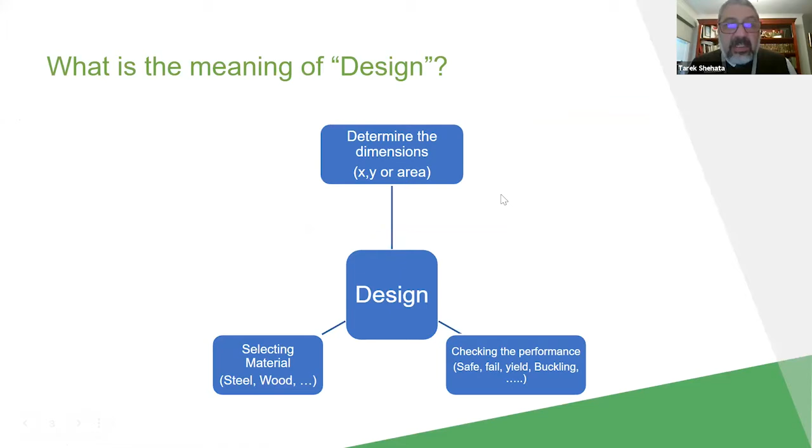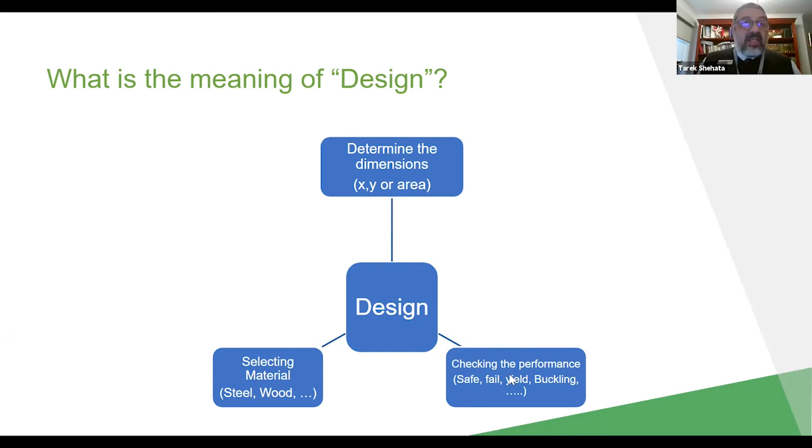When we talk about design, mainly we talk about three issues. Either as a designer to determine the size, so to talk about area or dimensions, to say this part should be in this size; or to select the material, to say based on the required sizes and the loads, we are going to have this material, so you can say steel, wood, aluminum, and so on; or as a designer to check the performance of the member.

Last week, we were talking about the member under tension. We said the load, when we describe it as an axial load, we talk about the load being through the axis of the member. This is why we call it an axial loaded member. Last week we finished tension, so today we are going to talk about compression.

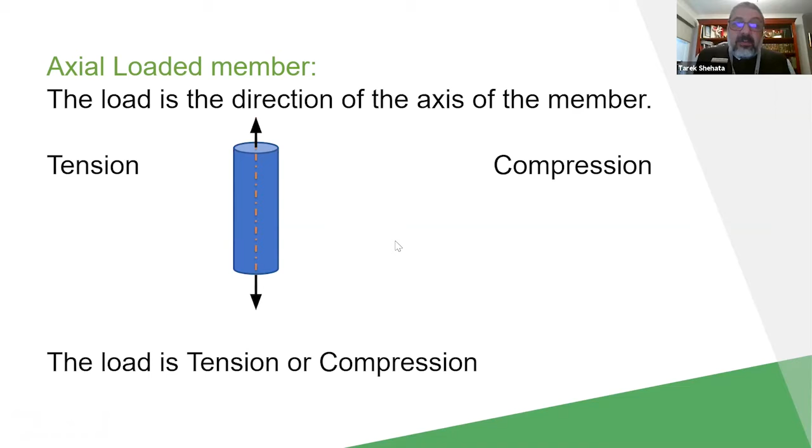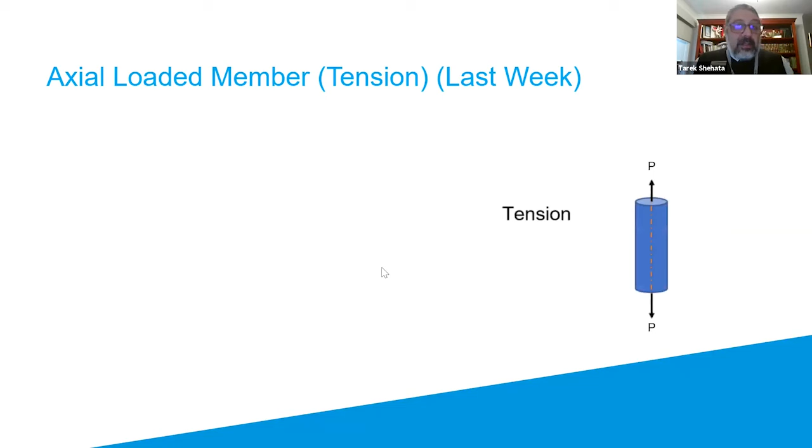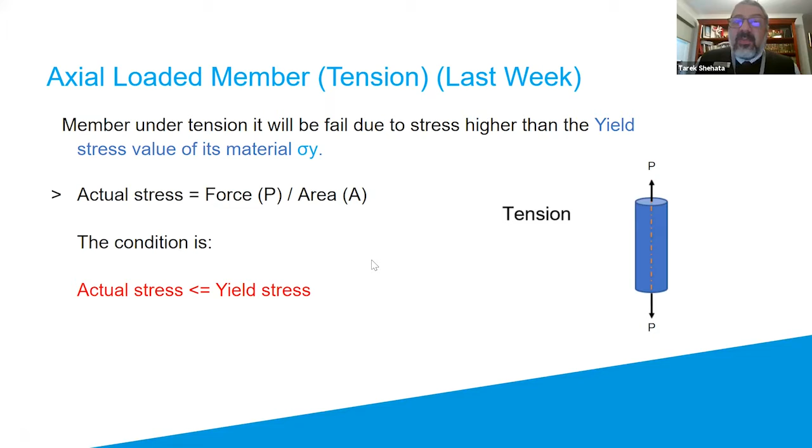So in the case of compression, let's review what we did in tension last week. We said the main condition for tension is that based on how much load I have and what is the actual area, I can calculate my actual stress. To be safe in tension, you need the actual stress to be less than or equal to the yield stress. Yield stress is one of the material properties.

Today, we are going to talk about the axial load, so in this case we'll talk about compression, and mainly today we are going to concentrate on how to use the Euler equation. So, member under compression, axial load: as you can see in the figure here, I have the member in a shape - doesn't matter what is the shape, I selected a cylindrical shape. So the load itself, P, compresses the member in the direction of the X axis of this member.

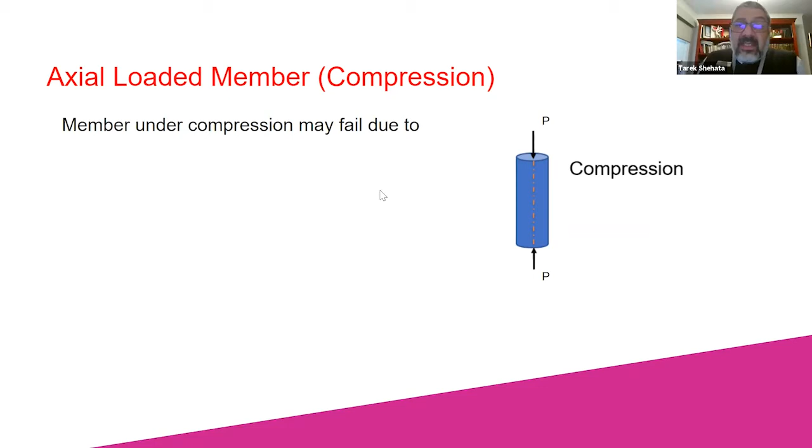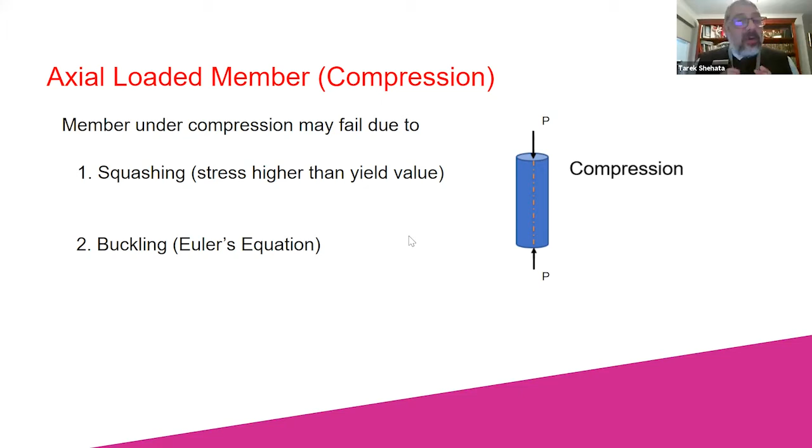In this case, we worry in our design this member will fail. The member will fail due to compression because of two things: either squashing, where the load will squash the member, or the member will be buckled. Buckling means the member is not broken, but it could be bent, something like that. So buckling is when the member will be bent. I have another picture to help us show it's not broken, but it will be bent.

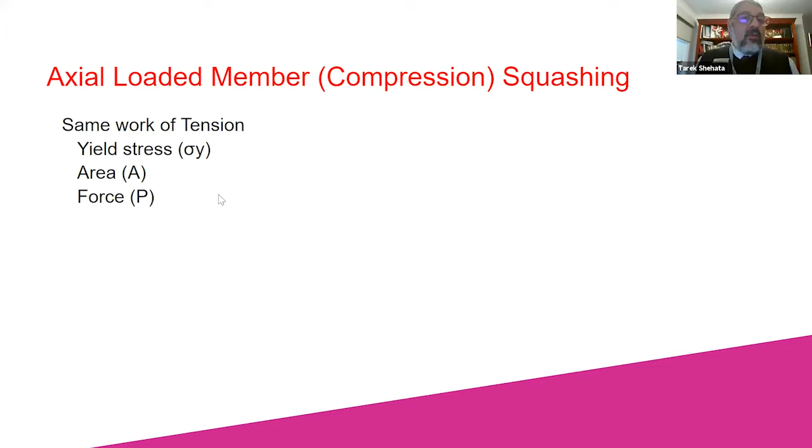Last week, when we discussed tension, the case of squashing is similar, so what we did for tension will be the same for squashing. You check how much actual stress you have and compare it with the yield stress. If your actual stress is smaller than or equal to the yield stress, the member is safe. If not, the member will fail.

But today we wanted to discuss the case of buckling. Buckling is controlled by an equation called the Euler buckling load. This equation can tell us what is the maximum load based on the properties of my member.

This term may be new to us. We have, soon we will talk about it, the length, and this is again part of the dimension of the member. So in this case, you will find Euler linked some elements related to material properties, like Young's modulus, and some elements related to the dimension of my member, like I and L.

What is the condition? You need to have your load not exceed the load calculated by Euler. What's the meaning of that? Euler load is the maximum load to be carried if you have this member. So this is the condition: if your load exceeds the Euler load, P Euler, in this case, the member will fail.

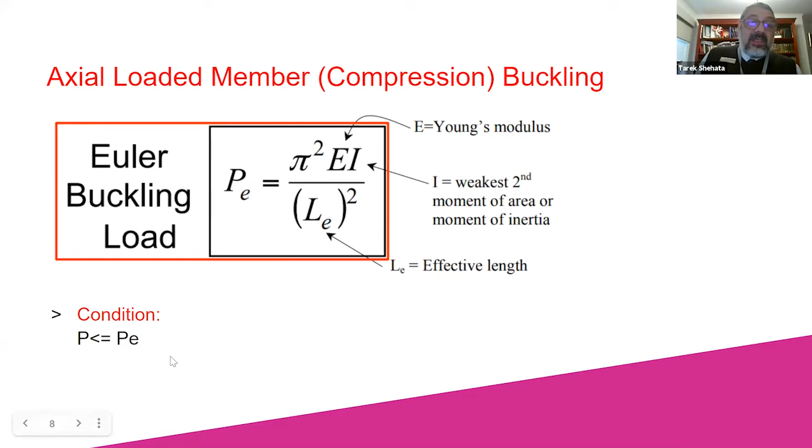Okay, so effective length. Effective length, maybe this is a new term for us. We know the length, so if I have a member between two points here, I can say this is the length of the member. So what is the effective length?

Effective length is, when I have a member under compression, the part of the length of this member that gives me half of the sine curve - half of it - this will be my effective length. Look at this case here, pin to pin: the whole member is curved, so K will be equal to 1. So the effective length for this case will be the whole length.

But if I have the member fixed from the two sides, in this case, you will find at the start the member will not be bent, and at the end it will not be bent, but half of it will be curved. This is why we consider the effective length, and K in this case will be equal to 0.5.

Case of fixed in one point and pinned in another point: you will see that the bending happened not all the way - close to the end it's straight now - but about 70% of the member is curved.

But if I have a member like the last one, fixed to free, if I wanted to get half of a sine wave, I need this curve to be twice as long. This is why K will be equal to 2. It's very important for us to know that the effective length will be based on the way we fix the member, or the way we support the member.

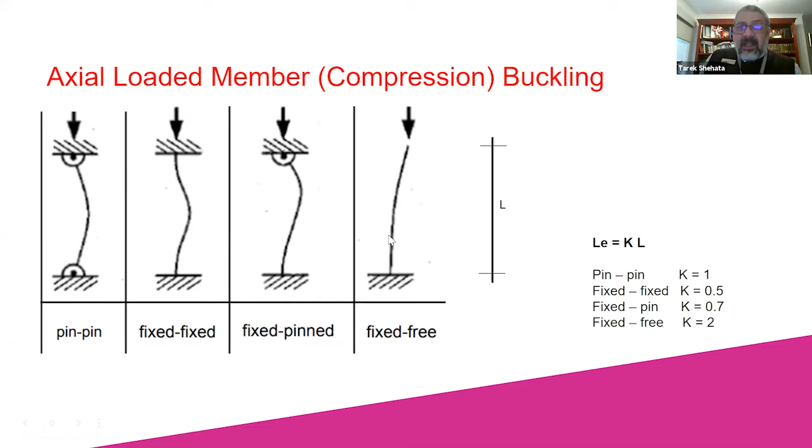Let's see the different cases. As I said, Euler is for today, because, as I said before, we covered tension last week, and we know squashing will be similar to tension, so I'm not going to repeat what we did last week. Today we'll concentrate on how to use Euler to calculate or check your member under a compression axial load. Let's see the first case here.

If I have the material, the effective length, and the cross-section property, which is the moment of inertia, Euler can help me find what is the maximum load. If I know the maximum load, this will tell me later if my member is safe or not. So if I have all these given, I can determine the maximum load I can apply to this member. This is one case. Euler will stay with us for another case.

If I have material properties E, the effective length LE, and the force, Euler can help me determine, if you look at the equation, you have the load, E, and L, so you can calculate the minimum value of I. In the following weeks, we'll give you a special lecture about how to calculate the value of I, so maybe later I'll just give you the value of I directly, but there is a special session to calculate it.

Another case: what if I have the effective length, the cross-section property I, and the load? In this case, I can calculate the minimum value of E. And the minimum value of E will tell me which material I can select.

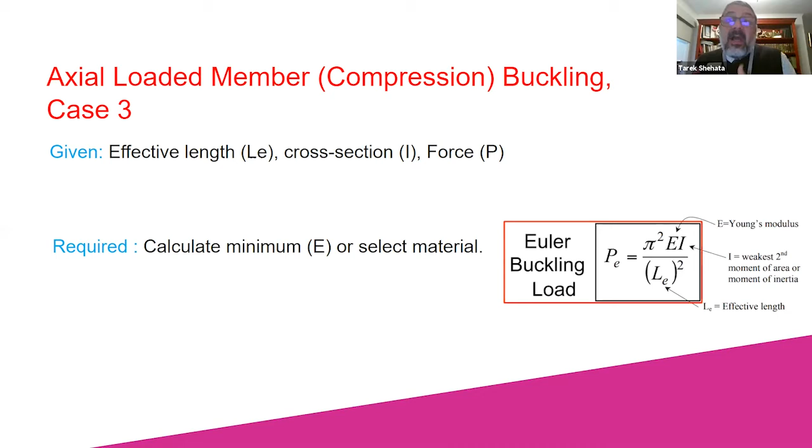For example, if I check the tables now, I need a material with 150 gigapascal. If I check the tables, I will not find any material exactly 150 gigapascal, so I'll try to see a material higher. If I check steel, it will be 200 gigapascal. If I check aluminum, it will be 70 gigapascal. So in this case, I can't take aluminum, it's 70, I need 150, but I'll take steel, because steel is higher than the minimum I need.

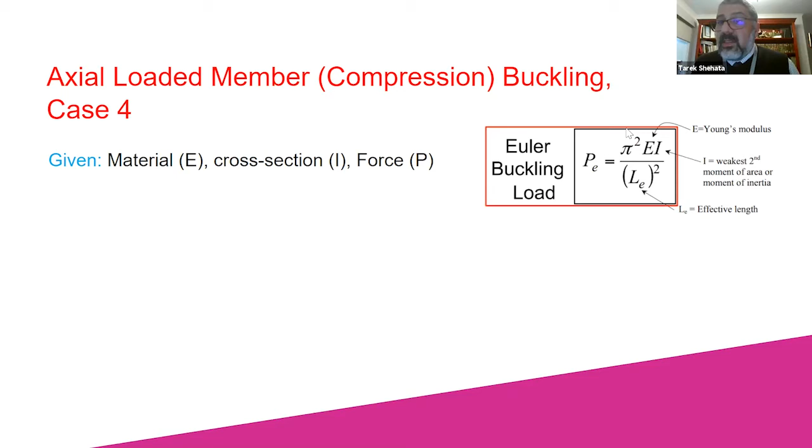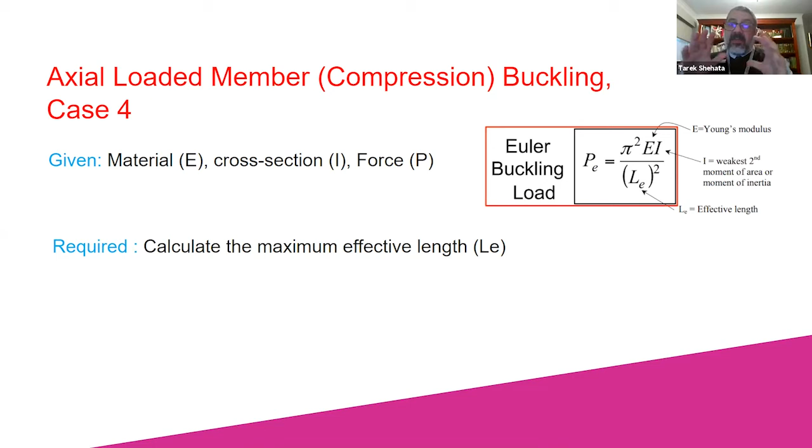Still, we have Euler. What if I have the material property E, the cross-section property I, and the force? This will tell me what is the maximum length I can have for this member. Because if the length increases, the load will be above the limit, and in this case I will not be able to carry the load and the member will start to buckle.

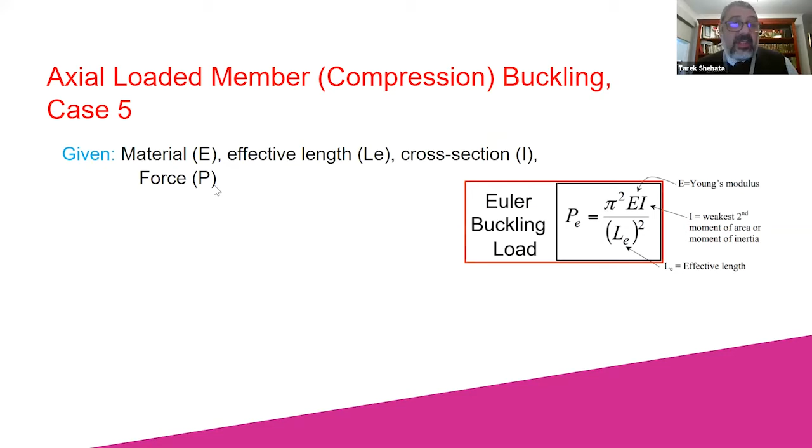Last case here for Euler. If I have the material property E, the effective length, the cross-section property I, and even the load, what I have to do as a designer is check if this load is safe or not. If you have all this information, you can compare your actual load to Euler's calculation. If your actual load is higher than Euler, that means this member is not safe. If your actual load is smaller than Euler, your member is safe.

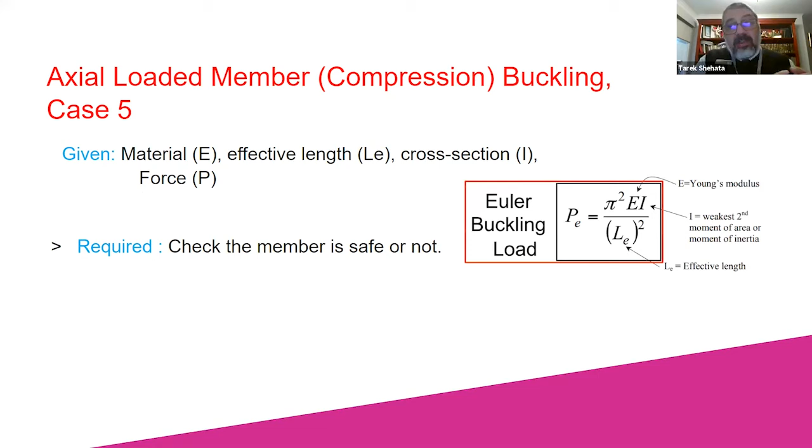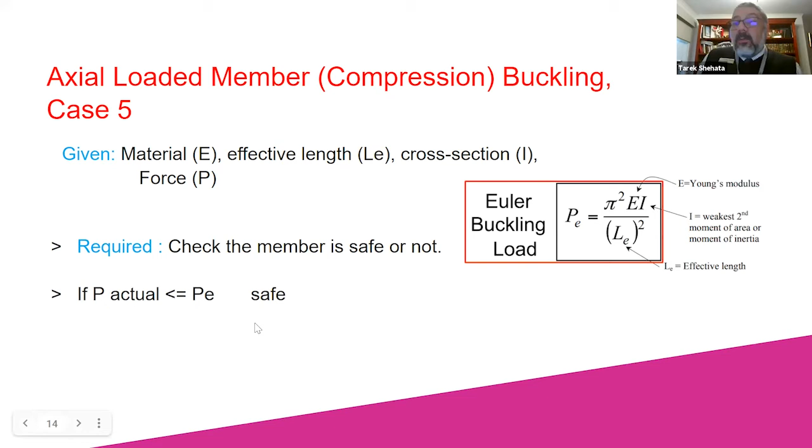If your actual load is exactly equal to the Euler calculation, you are just safe, meaning this is the critical value. The condition all the time is that the actual load needs to be smaller than or equal to the Euler load. I think a numerical example can summarize all this story when we do it together.

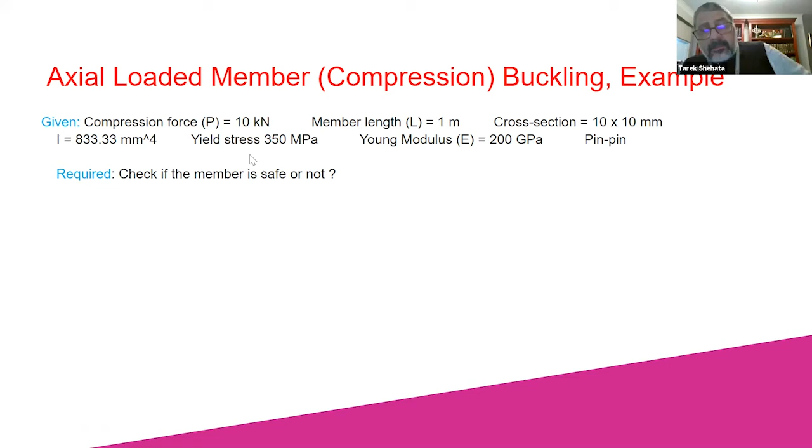So we have material properties given to us, a case with a compression load of 10 kilonewton, member length 1 meter, cross section 10 by 10 millimeter, I of this cross section is 833.33 millimeter to the power 4, yield stress 350 megapascal, Young's modulus E 200 gigapascal, and this member is pin-to-pin in support.

We want to check if this member is safe or not. The load is compression, so I have to check: is this member under tension or compression? The member is under compression, so I have to check two things: first squashing, second buckling. If the member passes both, safe for both, the member will be okay. If the member passes one and fails the other, the member will fail. If the member fails both, it definitely fails.

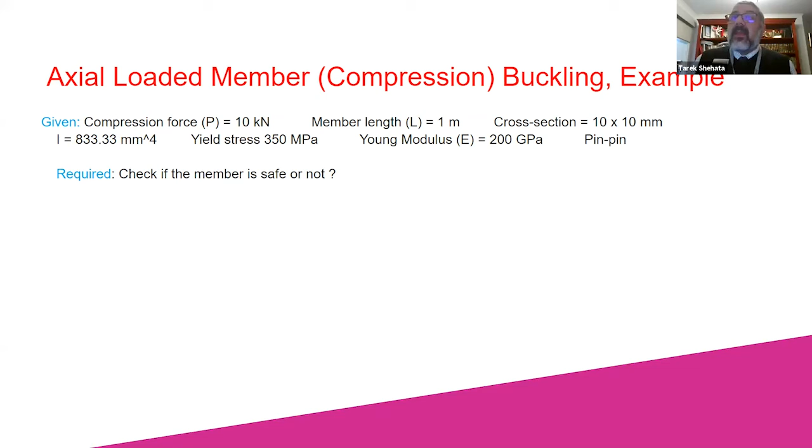So let's see now when I check the squashing. I'm going to calculate the actual stress. I have force, 10 kilonewton. Because our equation uses SI units, you have to put the forces in Newton, so 10,000 Newton, divided by area. Area is 10 by 10 millimeter square. This will give me 100 megapascal.

My actual load or my actual stress now is 100 megapascal. For squashing, I compare based on yield. So if I look at 100 megapascal and the yield stress 350, my stress is less than the yield value. So my actual stress is smaller than yield stress, which is 350. So far, I can say the member is safe, okay for squashing.

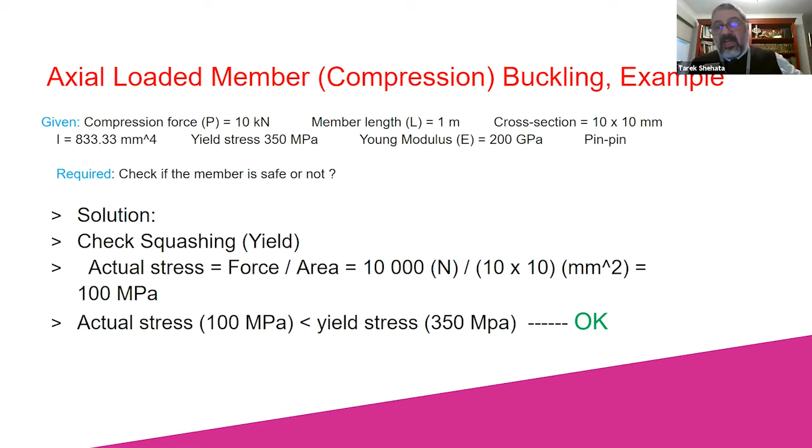I have now to check using Euler the buckling situation. If the member passes buckling, fine, we can say safe. We have to bring Euler with us. Don't forget, we have everything: the load, Young's modulus, I, LE, we have everything. So what I'm going to do is check first for this member. The member has E, I, and L.

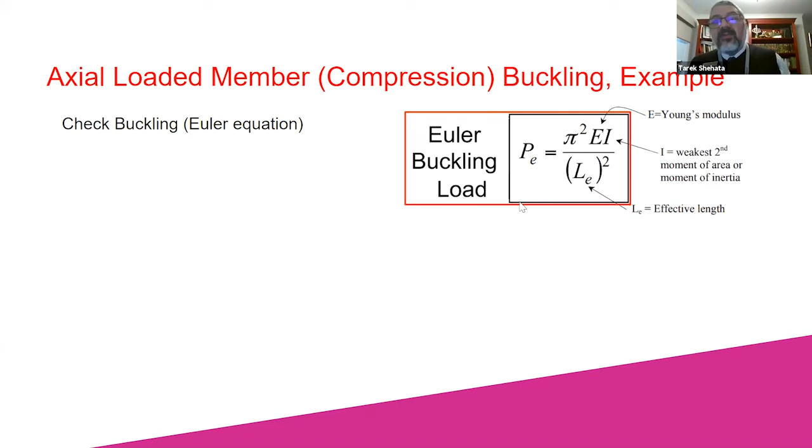In my example, what is the Euler load? In other words, what is the maximum compression load for this member to avoid buckling? Euler, pi squared, E 200 giga, so you have to make it SI unit, 200,000 megapascal. I is 833.33 millimeter to the power 4, divided by L effective. L effective equals KL, and K in this case, pin to pin, is 1. So 1,000 millimeter, because we have 1 meter length, K is 1 for pin. Don't forget to square it. This gives me a value of 1,644.9 Newton. This is the maximum load for this member to carry in compression to avoid buckling.

Let's check now, what is our case? If this is the maximum load, my actual load is 10 kilonewton. I put the values in kilonewton here because I'm not doing the equation now, the equation should be SI units, but here I can do the comparison in another unit, kilonewton. So Euler says about 1.6, 1.65 kilonewton, and my actual load is 10 kilonewton. That means this member is not safe to carry this load.

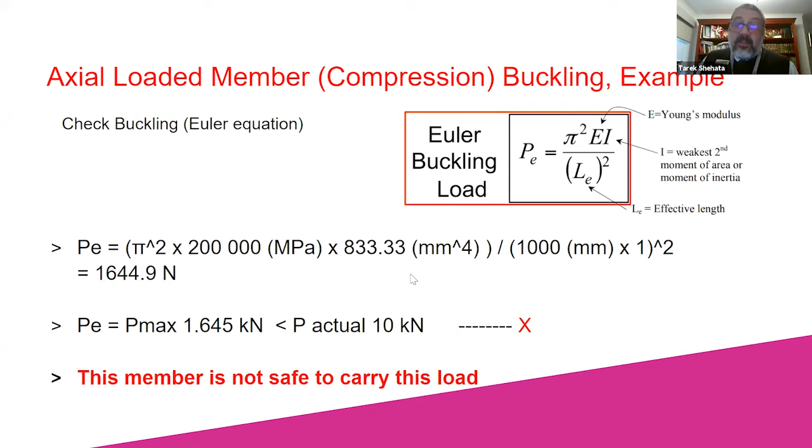So today we checked how to use Euler to check the performance of the member if the member is under axial compression load. Thank you very much for joining the Diploma of Engineering sample class.